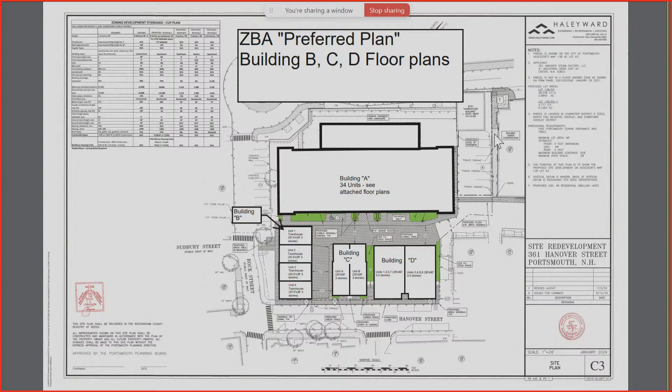Currently, the building is fronted with an existing parking lot. If you want to go past the building plans to the site set, there's a part of this application that is a subdivision. Currently, there's the main building, 361 Hanover, and then behind it is...

191 Hill, I believe, and it's a smaller building. The two buildings on the same lot consist of and are a part of a condominium, but the proposal is to cut off the back building as a separate lot, and that's what the subdivision plan shows.

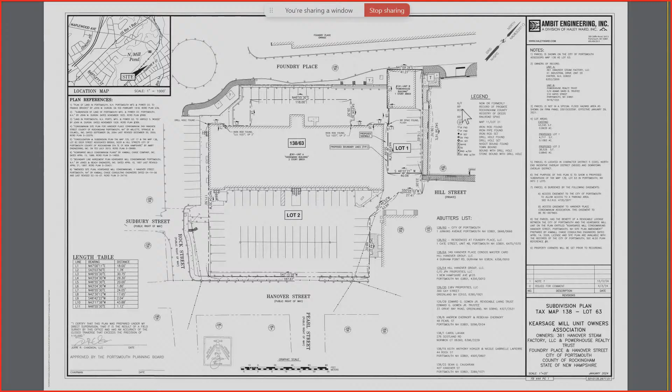The lot would meet all of the requirements under the zoning and have 8 dedicated parking spots. The next plan, excuse me, is a proposed license area plan.

The license area would be developed with landscaping and other site amenities. There would be no building in there, but that's a part of the desires for this application.

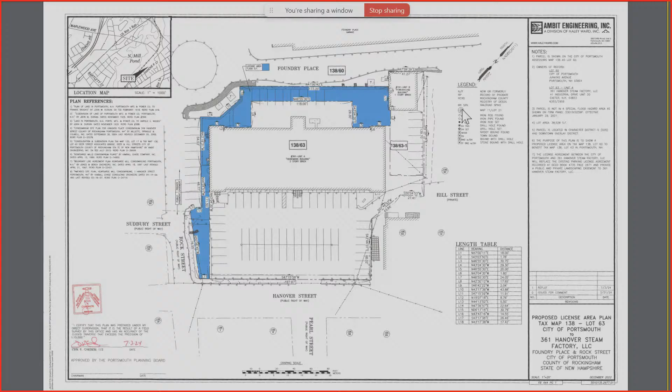The next sheet is just an overview, an aerial overview for reference. And then the next sheet is the existing conditions plan, their utilities in Hanover Street. Foundry Place is shown on the north or top side, Rock Street.

And there's a parking area of 11 cars on the west side. That's sort of a neighborhood parking area. You see the parking spaces to the north of the building. Those would be eliminated. They are on city property, and they were part of a prior lease agreement with the Heinemann Building to park there.

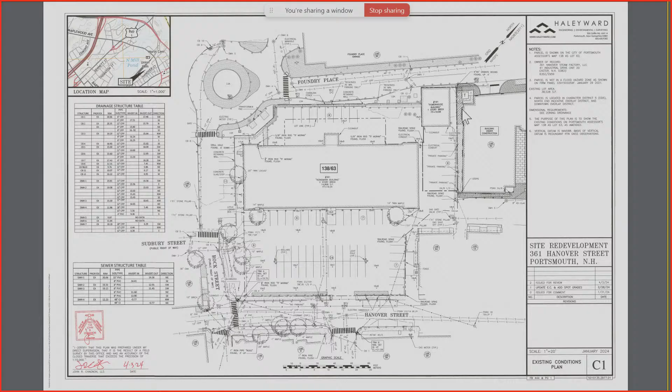Next sheet is a demolition plan. The main building is remaining, but there's an addition in the north middle that will be removed. Other than that, it's mostly just taking out the existing pavement. The lot is predominantly paved, a large percentage, and the proposed license area is predominantly pavement. So there'll be some major improvements in impervious surface.

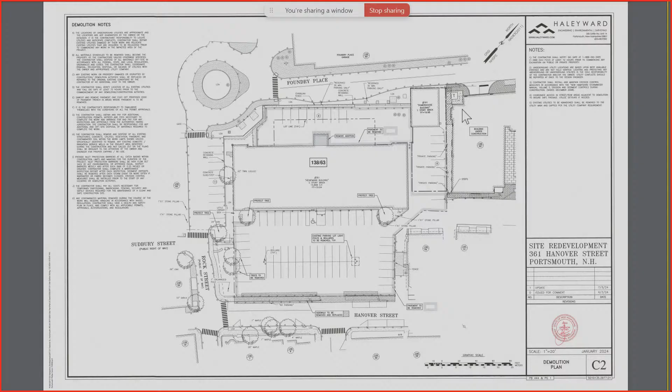And then we get to the site plan, and the proposal is to construct additional stories on Building A, which is the existing Heinemann Building, and in front, construct 3 buildings, Building B, Building C, and Building D, starting from Hanover Street, left to right. Building B on the left would be 4 dwelling units, Building C in the middle would be 2 dwelling units, and Building D would be 8 dwelling units.

There would be an access between B and C that would come off of Hanover Street and go to Hill Street, which is on the right side in the middle of the page. There will be some surface treatments to identify the difference between that drive lane and a series of walkways that would get people from Rock Street through the site over to an extended sidewalk that would connect to the sidewalk being constructed on the GL Rogers building, which is going up. It has a Foundry Place address, but backs up onto Hill Street.

The green areas are the proposed landscape areas. We don't have a detailed design yet, but we intend to, and that would comply with the open space requirements.

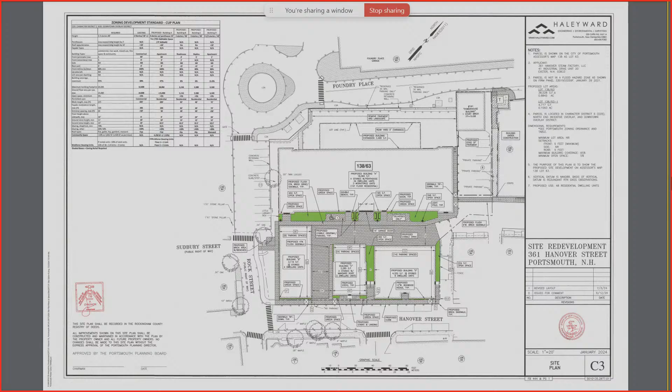The next sheet is utilities. We're showing services coming from Hanover Street. We've got a new sewer service for Building D, a new sewer connection for Building B right out to the street, and then a connection from the Heinemann Building in that driveway area to a manhole connecting Building C.

And then running out to an existing sewer manhole in Hanover Street. Electric may come from the existing transformers at the Circle, Foundry Place cul-de-sac area, and run around to a new pad-mounted transformer, then run between the front and back buildings and connect to an existing electrical vault, which is in the north corner next to the 191 building.

So that would make for a loop service, with services to the buildings coming off of that loop. The water currently serves the building that will have to be relocated, but we're going to locate that between buildings C and D, and also run gas there.

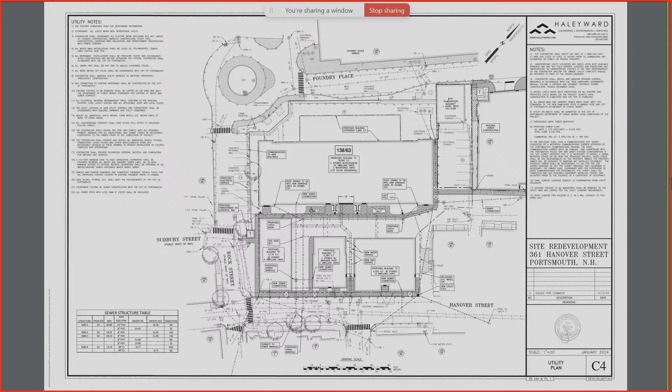So I think that unless one of the principals wants to add anything to the presentation, that's it for now. We look forward to your feedback. All right, let's open it up for discussion.

Shanti, if you had anything, just chime in. Yeah, I mean, I probably want to see better plans before we move this on to the planning board. I know this is just a work session, but a floor plan showing exit pathways.

So in between, there's a 9-foot space between those two buildings, right? And just as long as, when you do your code review, I think you'd be limited on your amount of unprotected openings, because with more than one building on the same lot, this will all be one parcel, I believe. If that's correct, the building code says you have to treat it as an imaginary line down the center. So at 9 to 10 feet you'd be good to go, no restrictions with openings, but at 4.5 feet you will have some restrictions. Just be mindful of that.

But other than that, at this point, I don't have anything really more to offer.

If you have questions? Yeah, I don't have a question, Shanti, just a clarification. I hadn't really noticed that was 9 feet in there. I think we do have some latitude to make it 10 feet, and then it's not as restricted with openings.

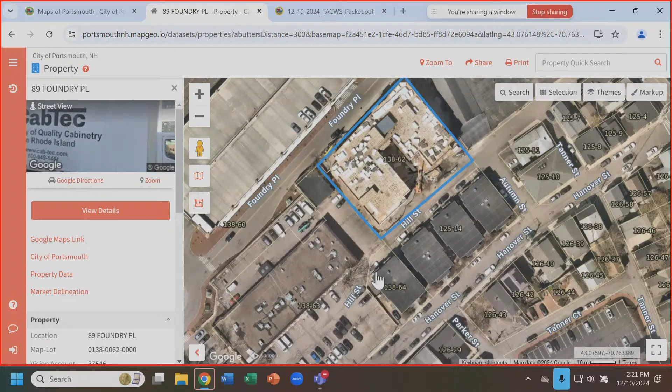That's why you're here, so we'll get you that information. Okay, absolutely.

You understand, I know you do, that it's quite a - not that I have any level of understanding compared to these two guys or many of you - but there's a lot of historical lot lines and property lines there that go back 100 or more years. So the research is pretty tedious.

And currently, the most recent conveyance that we're talking about, it isn't even clear to me as the owner of the property, because it's off of my property. There is clearly an easement from the 6-unit building that the hand is on right now to go through our property.

So the considerations were to create another driveway going directly out to Hanover Street between our properties, or to allow them to drive through the general roadway between the buildings and out to Hanover Street.

And then there has been some discussion from other abutters as to whether that was a public right-of-way, including our discussion about the city and that whole thing in the back, et cetera. So it's not a simple analysis, is what I'm saying.

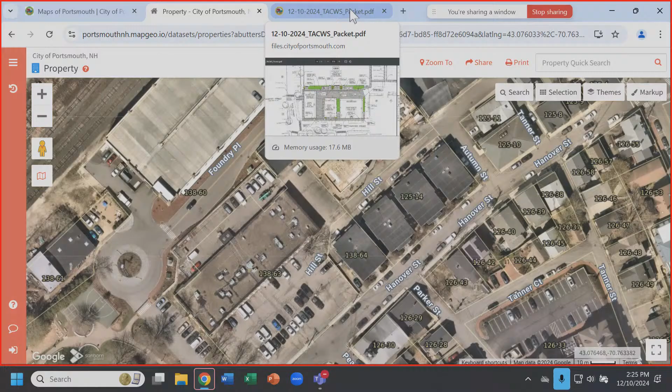Yeah, we just would need to make sure that we have the right to go on it and that it more or less passes muster. I think what we'd be looking for, both from a public safety perspective and if you're including some kind of multimodal way through there, is the ability that it's going somewhere and you can get back out to a public right of way that's not going to be closed off at any time. That may be in place already, but we'd have to see how our property line carves that.

It's not quite parallel to Hanover Street where your arrow goes, and then it turns down towards Hanover. So that piece of land with the tag on it belongs to that six-unit property right there. So we would want to make sure we have the right to give you the right to go through there, okay? And as I said, your apparatus would fit through on our property, but I don't think you'd get another truck going the other way. So that's what I know about it. I just want you to understand the geometry of the lot at that point.

How would you manage it if there was not public access there, but we wanted to keep it open for the fire department? Are you amenable to a gate that you could operate, or?

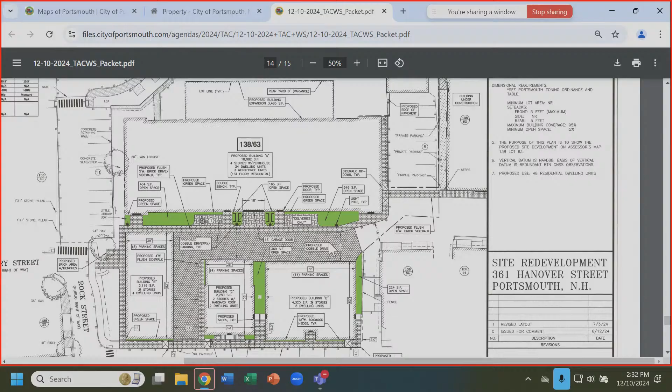I wasn't too sure those have to be totally exclusive. Right, I mean the benches can be included in the community space, like you have seating.

I can put this to bed. I think you guys could resolve that between the submittal. I'd suggest maybe we should come through with a community space plan, and it'd be worth talking about—like a couple of benches, the amount we're talking about. If I did that, I'd have to skinny up or broaden another green space area.

I think the whole intent of this plan is to provide a more bifurcated facade on Hanover. So we have an alley, a driveway entrance, or two alleys, and another one facing Hill Street. The whole idea is to minimize—this is not optimizing the revenue stream for sure with this plan, okay? So I'm showing the willingness to improve the plan for the public benefit.

I think what I would say is there's already a pedestrian bicycle sort of pathway there—bikes and more people go in front of our building to go downtown from all the neighborhoods on the side, up towards Rock Street and beyond. And so fundamentally, I don't think we want to stop that. I think it adds a sense of openness.

So if we have to gather another 20 or 40 or 60 square feet of open space, depending on how your subsequent discussion on this goes, we can certainly do that, okay? And if I need to modify the tactile nature, like make the driveway area more of a smooth driveway and the sidewalk curbed and cobbled, so you can really see and feel where the sidewalk's supposed to be—we really haven't made an effort to skinny up these driving areas, although in my mind I'd prefer that the only people using this courtyard, what I call the driving area, are the people who live there, who are very familiar with how the traffic goes.

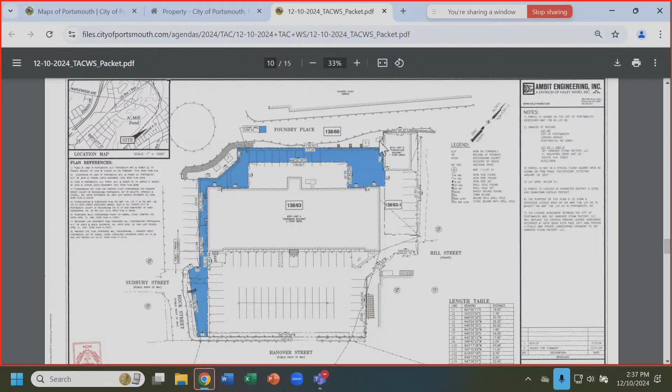So Steve, if I can hop in a little bit here about the license area, because I did meet earlier today with the deputy city manager and with Peter Rice to talk about that license area. Similar to how we've handled some of these requests in the past, I would recommend, because you're talking about the private reuse of city property, that we try and work on some agreement between us that we can bring to the city council before the full planning board, so it can be referred, so whatever that agreement is can be recommended and referred by the city council to the planning board to be considered basically at once. Then all easements, if there's community space, if there's workforce housing, if there's a license or something else for that area, that can all come back in one neat package.

We have had some preliminary discussions. Our intention to acquire that property is only, it's not necessary to our development, it's really just to make it nice and to have somebody responsible for maintaining it. It's very difficult for the city to maintain because especially where the retaining walls are, there's no access to get up to it at this point, unless you have a crane to lift your mower off the hot top. So I'm hoping to lay a strong pitch out there to turn it into the responsibility of the homeowners association to maintain it, and to present a landscape plan that would encourage you guys to say yes.

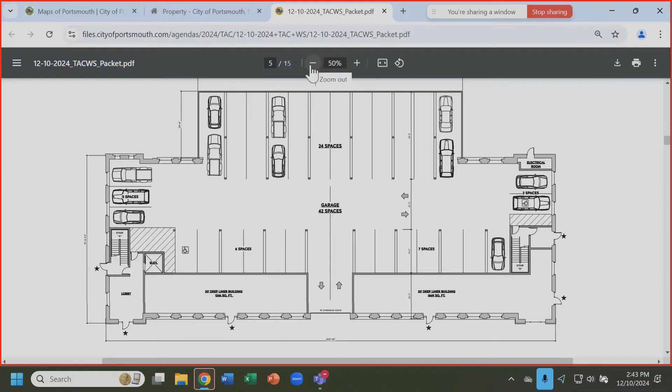And then plantings along the sidewalk of Hanover Street should be the type that won't overgrow on the sidewalk and restrict use in future years.

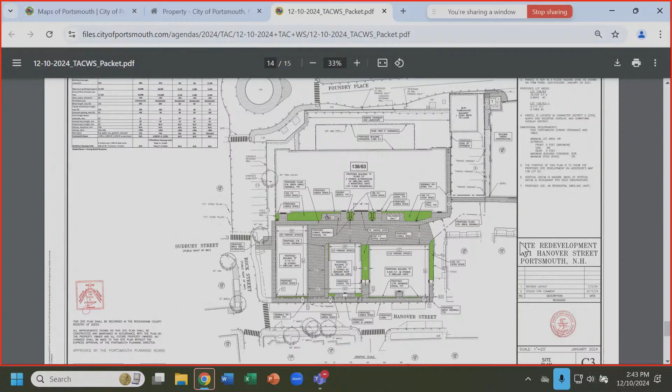So I got a bunch of stuff for you guys. I think what I'm gonna do is just scan the plans that I have so you can see everything. So just in broad strokes: John, we're gonna want you to use the 15-inch PVC sewer that goes down Hanover Street toward Bridge, and not the one that you're showing tying into.

On the existing conditions plan, you're missing several utilities that I know are there that may impact your construction. One of which is primary electric that's underneath the sidewalk that goes down the edge of Hanover Street, that Eversource put in as a backup loop 7 or 8 years ago. It's underneath that concrete sidewalk in front of the site.

So that's going to be directly adjacent to where your foundations are going to be, so you're going to have to plan for that.

You're also missing the communications conduit that comes out of the pole that's at the corner of Sudbury and Rock Street. There's a pole there with several drops on it. That goes to the manhole system that's out by the corner of Foundry Place Garage. And I've drawn these in for you so that you can see them, John.

The water and fire services for the existing building, you're not showing those on the plan. You're not showing the existing sewer lateral for the existing building or the Last Chance Garage. So I've kind of drawn those in for you where we think they are. So you're gonna have to show all those because they're gonna impact your development.

The electric pole boxes that you're showing on the existing conditions plan are old lighting for the parking lot that's been abandoned. So that's just junk in the ground. You can get rid of that.

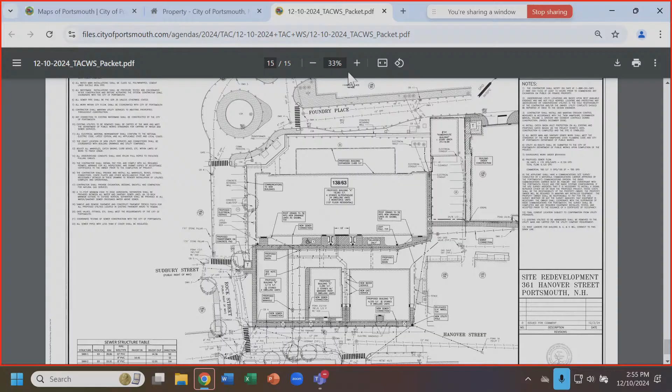Just out of curiosity, Dave, where do you think the sewer exits our building? We had it traced this morning, and it all points generally towards the direction of Hill Street internally. We know where it is out by Foundry Place, where the wall got extended, the new sectional wall - it's under that, and generally just to the left of where that electric manhole is shown on John's plan. We know that Last Chance Garage goes into that as well.

Right now that's all on city property, so everything's well and good, but the two sewer laterals are combined right now. So if you're going to reconfigure the sewer and send it out front, because you're adding significantly onto the building load, then we'll have to cut and cap the building service wherever it comes out, but leave the rest of the service viable for that other lot. That doesn't have additional capacity to handle it - it's 6 inch, doesn't have enough. With that number of units, it's just too small.

I'm happy to start with a clean, properly sized service - there's nothing better than a clean sewer lateral. That's what you say at Public Works. Something like that, yeah, not exactly what Peter said, but something like that.

That was probably the suspicion I had too - that the sewer went to the north and used to go somewhere north of the garage. We traced it all the way from left to right across the page this morning, from the furthest fixture towards Sudbury, straight line, and then weren't sure where it went from there, but it must turn towards the garage somehow outside. We don't want to replicate the fresh air issues that we had on Bond Mall.